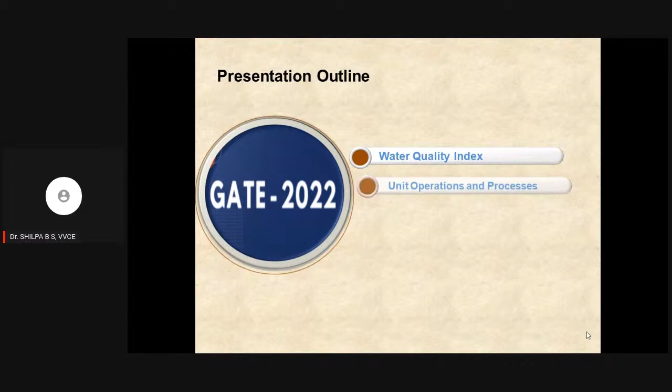So my presentation outline goes like this. I will be dealing with the water quality index initially, then I will go with water treatment unit operations and processes, then the water treatment methodologies, and then the water distribution system we will be studying in this particular session. So let us start with the water quality index.

Water quality index is a means by which the water quality data will be summarized for reporting to the public in a consistent manner. Usually the public will not be aware of the water quality parameters, so it will be represented in the form of a single number or rating, by which the public can be aware of the quality of that water, whether it is suitable for use or not. So we can say the water quality index is defined as the rating that reflects the composite influence of a number of water quality factors on the overall quality of water.

And usually this water quality index is a means of summarizing the parameters that we are considering. Maybe we can consider 4 important parameters, or we can consider 6 parameters or 8 parameters, depending on the scenario. So a large amount of water quality data will be considered and summarized in simple terms, so that it can be reported to the management or to the public or the policy makers, which will help them to take a decision in a considered manner.

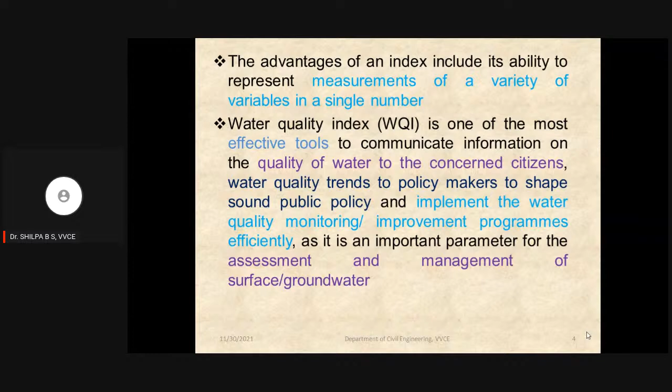So the advantages of this water quality index: it represents the measurements of a variety of variables in a single number. We need not see each and every parameter; that single number will tell about the quality. And as per practice, it was found to be a very effective tool to communicate information on water quality to citizens or policy makers, and to implement water quality monitoring or improvement programs in the society.

Coming to the methods of assessing the water quality index, there are 4 methods which are usually followed to express the water quality index. One is the National Sanitation Foundation Water Quality Index, then the Canadian Council of Ministers of the Environment Water Quality Index. The third one is the Oregon Water Quality Index. The fourth one is the Weighted Arithmetic Water Quality Index method.

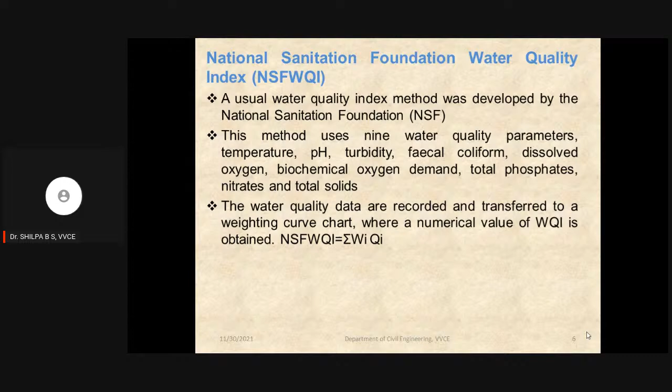Coming to the National Sanitation Foundation Water Quality Index, this is a usual water quality index method developed by the National Sanitation Foundation. In this index, it uses 9 water quality parameters such as temperature, pH, turbidity, fecal coliform, dissolved oxygen, biochemical oxygen demand, total phosphates, nitrates, and total solids. Considering these 9 parameters, the data will be summarized into the form of a single number. The formula used here to assess this water quality index is sigma WI into QI. Based on that mathematical relation, they calculate the water quality index in the national foundation method.

So this is the rating they have given: 90 to 100 rating is excellent, 70 to 90 is good, 50 to 70 is moderate, 25 to 50 is bad, and 0 to 25 is very bad. This gives the classification of the type of water resource usage when the water quality index is in that particular range.

Next is the Canadian Council of Ministers of Environment Water Quality Index. This CCME WQI provides a very consistent method of calculating the water quality index, which is mainly formulated by the Canadian Council of Ministers of Environment.

This index is combinations of 3 factors, not the parameters, 3 factors: F1, F2 and F3. F1 represents the number of variables whose objectives are not met, F2 represents the frequency with which the objectives are not met, and F3 represents the amount by which the objectives are not met.

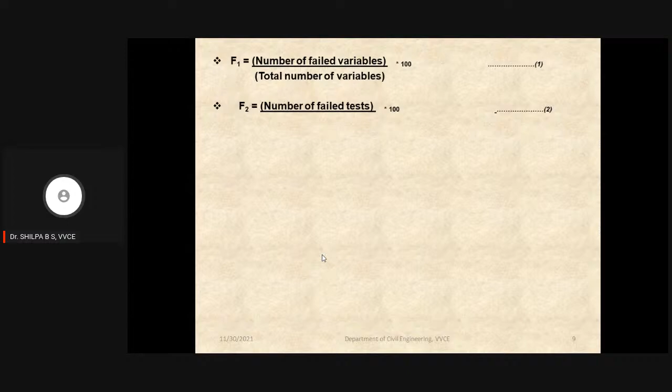F1 can be calculated as the number of failed variables divided by the total number of variables, into 100. F2 is the number of failed tests divided by the total number of tests, into 100. Test values not exceeding the test objectives are considered as excursion.

Depending on the ith parameter, we can calculate this excursion value: failed test value divided by the objective, minus 1. Similarly, for test values not falling below the objective, the excursion i will equal the objective i divided by the failed test value i, minus 1.

Based on these excursions, we can calculate the nse, which is the cumulative of the excursion divided by the number of tests. F3 can then be calculated based on this nse, using nse divided by (0.01 nse plus 0.01), into 100. This mathematical relation is used to calculate F3.

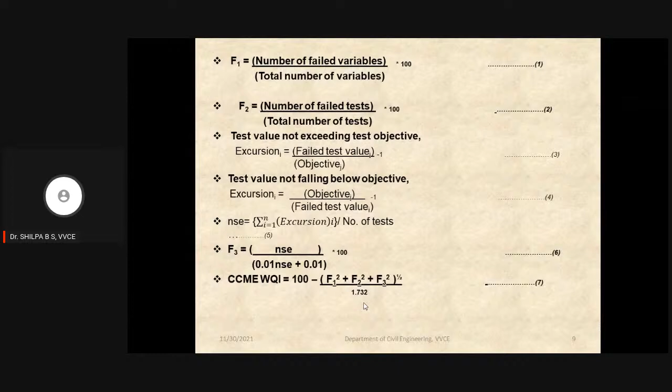The water quality index of CCME equals 100 minus the square root of (F1 squared plus F2 squared plus F3 squared), divided by 1.732. This is the relation used to calculate the water quality index in the CCME model.

This is the rating of CCME WQI. 95 to 100 is excellent — this is the characterization of water when the index is in that range. 80 to 94 is good, 65 to 79 is fair, and 44 to 64 is marginal.

That means the water quality is frequently endangered and conditions very often deviate from the natural levels when the index is in that range. If it is 0 to 44, it's poor, meaning the water quality is almost always endangered and conditions regularly deviate from the natural levels.

Next is the third one, the Oregon Water Quality Index. This index creates a score to evaluate the general water quality of Oregon streams. The parameters considered are temperature, dissolved oxygen, biochemical oxygen demand, pH, ammonia, nitrate nitrogen, total phosphorus, total solids, and fecal coliform.

This Oregon water quality model is designed based on the Delphi method. In this method, the water quality index employs harmonic averaging to give the ratings.

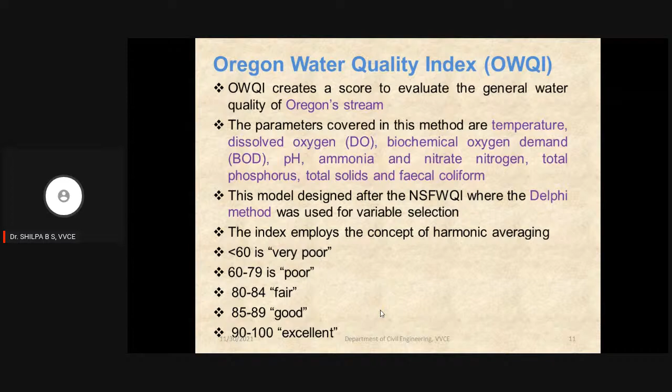Ratings are given as follows: when the water quality index is less than 60, it is considered very poor; 60 to 79 is poor; 80 to 84 is fair; 85 to 89 is good; and 90 to 100 is excellent. That is about the Oregon Water Quality Index.

Coming to the fourth one, that is the weighted arithmetic water quality index method. This method classifies water quality according to the degree of purity by which the most commonly measured water quality variables are considered, and is widely used by most researchers or scientists while calculating the WQI. The formula is: WQI equals sigma Wn into Qn, divided by sigma Wn, where Wn equals K by Sn.

Sn is the standard permissible value of the nth parameter. Whatever number of parameters we consider, we need the standard value of that particular nth parameter. Qn equals 100 into (Vn minus Vio) divided by (Sn minus Vio), where Vn is the estimated value of the nth parameter that we have measured, and Vio is the ideal value of that nth parameter in its purest form.

Based on this we can calculate Qn, and K equals 1 divided by sigma Si, where i varies from 1 to n depending on the number of parameters. Si is the standard permissible value for the nth parameter. Based on this formula, whatever parameters we consider, we can calculate the WQI using the weighted arithmetic method.

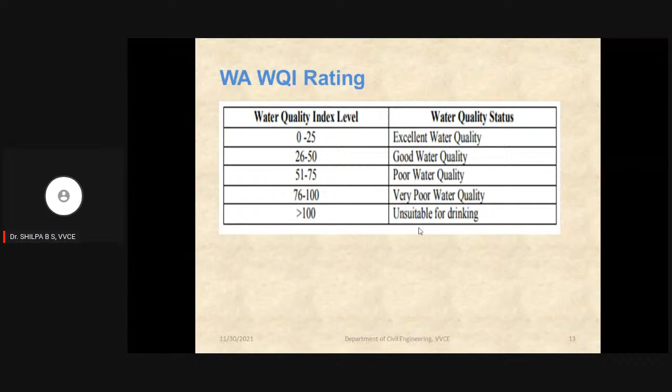So here it will start with 0 to 25, which is considered excellent water quality, 26 to 50 good water quality, 51 to 75 poor water quality, 76 to 100 very poor water quality, and more than 100, which we can say is unsuitable for drinking purposes. Once it exceeds 100, it is considered unsafe to use that water. So this is about the water quality index.

Next we will start with water treatment. But before we know about water treatment, let us understand what are the objectives or goals of treating the water.

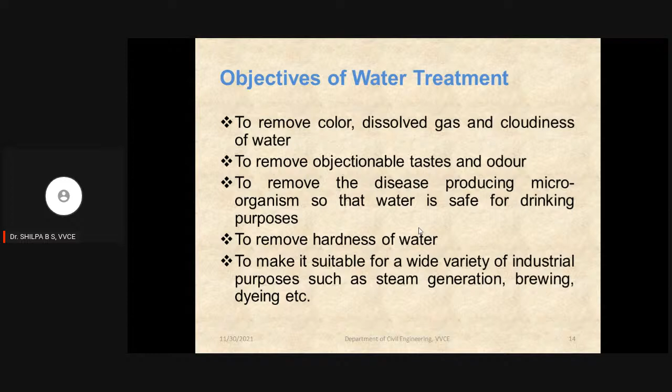First and foremost, we need to remove the color, dissolved gases and cloudiness present in the water by providing treatment. Then to remove objectionable tastes and odor, then to remove disease producing microorganisms so that we can make water safe for drinking, and to remove the hardness of water. Then to make it suitable for a wide variety of industrial purposes, because based on the type of industry, the quality of water we need to supply will vary. To make it suitable for industrial processes, we have to provide treatment to the water.

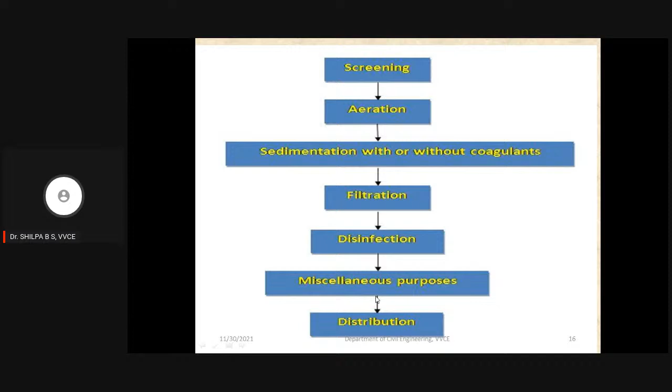So this is again a flow sheet showing the different unit operations and unit processes used in water treatment. Starting from the screens present in the intake structures, then when we come to treatment, it starts with aeration, sedimentation with or without coagulation, depending on the quality of water being taken. Next comes filtration, disinfection, and then miscellaneous treatment. Depending on the purpose for which we need to supply water, apart from the conventional treatment, we need to provide some additional treatment methods, referred to as miscellaneous treatment. Then we can go for distribution.

So coming to the treatment methodologies, generally water treatment methodologies are classified as unit operations and unit processes. Unit operations are those treatment methods where physical forces predominate. Whereas unit processes are those treatment methods where chemical or biological processes take place, where addition of chemicals or biological organisms brings about the treatment in water. So broadly, we classify treatment methods as unit operations and unit processes.

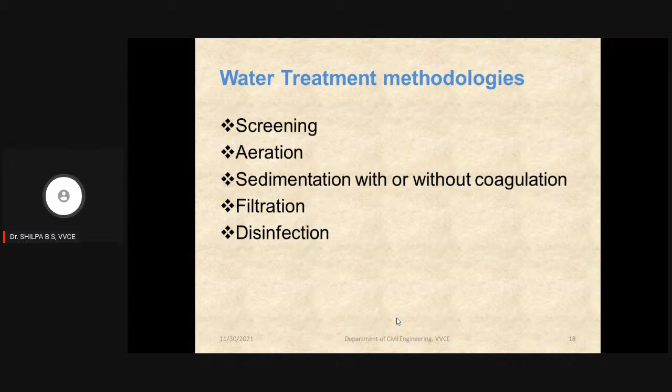Now let us know what water treatment methodologies are adopted: screening, aeration, sedimentation with or without coagulation, filtration, and disinfection. These are the conventional treatment methodologies adopted in almost all water treatment plants before supplying to the public. We will discuss these methodologies in detail one by one.

Starting with, before that, this is one question from a previous year GATE paper. Potable water is prepared from turbid surface water by adopting the following treatment sequence. They are asking us for the treatment sequence - what will be the correct sequence?

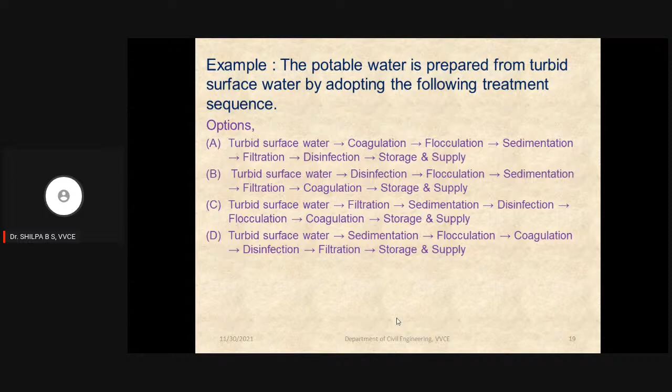The options given are: first, turbid surface water, coagulation, flocculation, sedimentation, filtration, disinfection, storage, and supply. Second, turbid surface water, disinfection, flocculation, sedimentation, filtration, coagulation, storage, and supply. Third, turbid surface water, filtration, sedimentation, disinfection, flocculation, coagulation, storage, and supply. And the fourth option given is turbid surface water, sedimentation, flocculation, coagulation, disinfection, filtration, and storage, and supply.

So among these four options, the correct option is option A, because for turbid surface water, this is the sequence of treatment we provide to remove turbidity or other impurities. First we need to add the coagulant, which we call coagulation.

Once coagulation takes place, we have to remove those suspended solids through flocculation, and then go for sedimentation. In sedimentation, the bigger size flocks are removed, whereas the supernatant is taken to the filtration unit using various types of filters, to remove the fine suspended flocks. After filtration, we go for disinfection, the last phase of water treatment. After disinfection, the water can be stored and supplied to the public. This is the correct sequence of water treatment.

Coming to the first treatment methodology we are discussing, aeration. This is one of the unit operations where gas transfer takes place, and it is very important to exchange gases between the atmosphere and water.

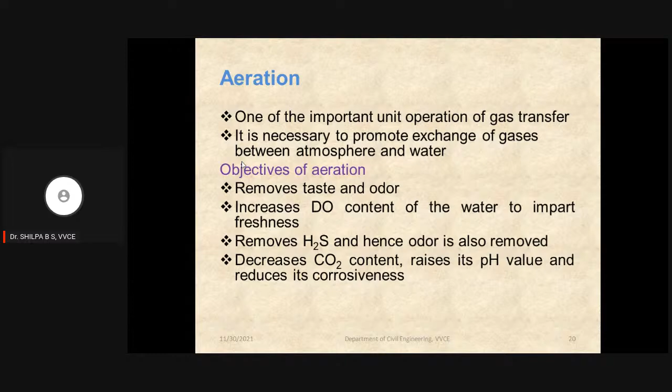The objective of aeration is mainly to remove taste and odor, to increase the dissolved oxygen content of the water, to impart freshness, and to remove hydrogen sulfide. Once hydrogen sulfide is removed, odor can be removed, because hydrogen sulfide imparts a rotten egg smell to water. Similarly, aeration decreases the carbon dioxide concentration, increases the pH value, and removes iron and manganese from the soluble state to the insoluble state.

Aeration can also be used as a process by which we can mix chemicals with the water. These sketches show the exchange of gases from the water bubble, or from the liquid to the gas.

In the first sketch, we consider an air bubble surrounded by water. Here the saturation value is shown to be less than the concentration of DO present in that gas, meaning the saturation value is lesser than the actual DO concentration of the gas. In such cases, if the liquid surrounding the air bubble or gas bubble has a lesser concentration of DO, the gas will move from the gas phase to the liquid phase.

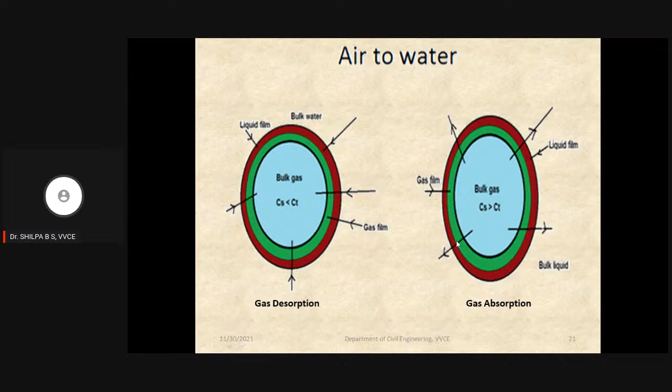Next comes gas absorption, when the saturation value is higher than the actual DO concentration. In that case, the liquid will absorb the oxygen. This happens as per Henry's law.

Factors that affect the exchange of gases are the area of interface between air and water, the thickness of the interlayers, the time of contact between the two films, the partial pressure of the gas overlaying the atmosphere, and the degree of undersaturation or oversaturation of the gas in water. These are the important factors that vary the dissolution of oxygen.

Let us know what is important to keep in mind for proper aeration. First, we need to increase the area of water coming in contact with air. Most of the time, water is sprayed into smaller droplets so that we can increase the area of contact of water with the gas. This is one way to have proper aeration or increase the rate of aeration.

The second thing is to keep the surface of the liquid constantly agitated so that we can reduce the thickness of the liquid film. When the thickness of the liquid film is less, it initiates or increases the rate of exchange of gas. With turbulence, mixing of water takes place within the body, and a thin layer of water comes to the surface every time, getting exposed to the atmosphere, increasing the rate of exchange.

The third point is to increase the time of contact of the water droplet with air, or to increase the time of flow of water. If we allow the droplets to travel a longer distance in the air before being collected, or make the water flow in a thin film, we can make it flow for a longer period of time before it reaches the next treatment unit.

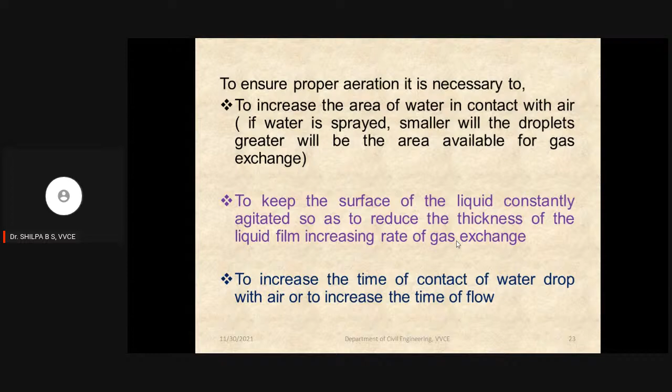By this we can increase the time of contact between the water and the gas, and we can increase the rate of aeration.

The two important mechanisms on which aerators are classified: one is forming droplets or thin sheets of water which are exposed to atmosphere. That is one type of aerator.

The second principle on which aerators are designed is forming small bubbles of air which rise in water. So, forming thin films exposed to atmosphere is one form, where fine bubbles of air rise within the water.

Here water is brought in contact with air in the form of a thin film, whereas in the second type small air bubbles are made to come in contact with the water. Based on these two mechanisms the aerators are designed.

The important types of aerators are free fall aerators, commonly referred to as gravity aerators. We have four gravity aerators: cascade aerator, inclined apron aerator, slat tray aerator, and gravel bed aerator.

The other three types are spray aerator, mechanical aerator, and air diffusers or diffused aerators.

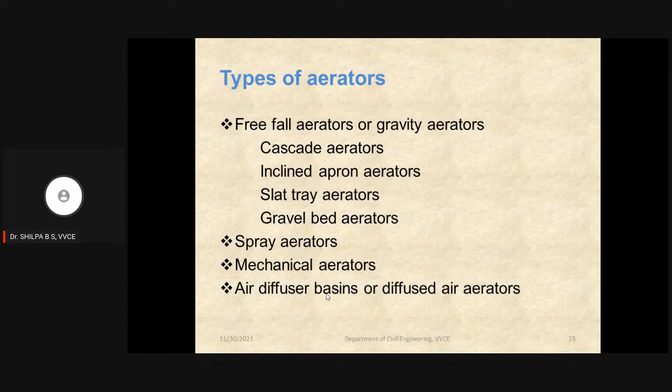Of these four types, in water treatment plants the most commonly used is the gravity aerator, specifically the cascade type, whereas others are majorly used in wastewater treatment, not much in water treatment. This is the cascade aerator.

You can see the schematic representation of the cascade aerator, where the raw water is made to pass over a number of steps in the form of a thin film. When it passes from one step to another,

the water is made to flow in the form of a thin film, as you can see in the picture.

In this way we make the water film exposed to the air, and when we provide more steps, we increase the time of contact of the liquid film with the air.

The design criteria - please remember these, as one or two questions may be asked on this. The number of steps usually provided is 4 to 6.

The head requirement for this cascade aerator is 0.5 to 3 meters, and the space required is 0.015 to 0.045 square meter per cubic meter per hour. The gas removal efficiency of this cascade aerator is 20 to 45% for carbon dioxide, and 35% for hydrogen sulfide.

This is the multiple tray aerator. Usually in this multiple tray aerator, coke or waste ceramics are placed to increase the surface area of exposing the liquid film to the air.

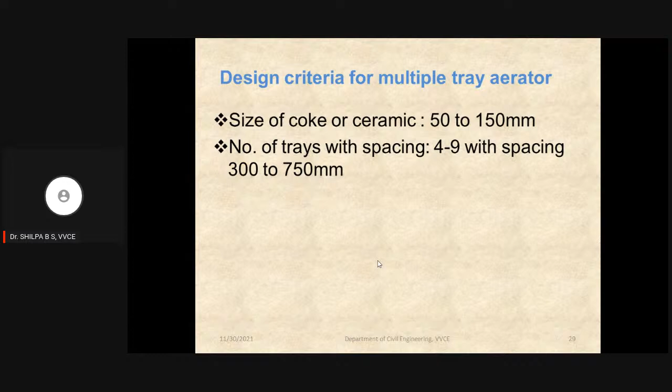Usually the spacing provided is 300 to 750, and the height of the multiple tray will be maximum 3 meters, so it can vary from 1 to 3.

The space required for this multiple tray aerator is 0.013 to 0.042 square meter per cubic meter per hour. The gas removal efficiency in this case is 65 to 90% for carbon dioxide.

And 60 to 70% of hydrogen sulfide can be removed, because here we increase the surface area of exposure of the liquid film to the air by providing coke or waste ceramic of size up to 150, which increases the efficiency of this aerator.

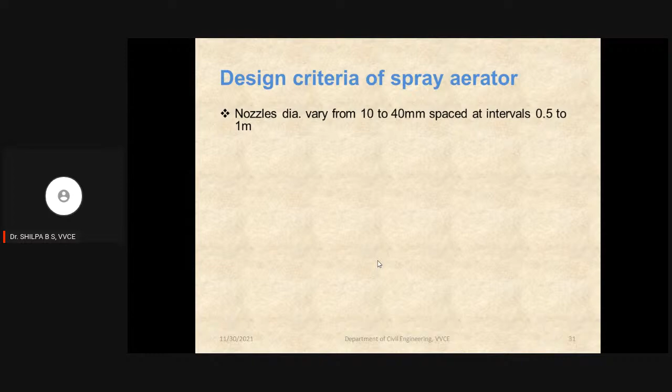The next type is spray aerators. As mentioned, it is mostly used in wastewater treatment, not much in water treatment. Here the nozzle diameter varies from 10 to 40, the nozzles are spaced at intervals of 0.5 to 1 meter, and the pressure head at the nozzle is about 7 meters.

Theoretically the pressure head required at the nozzle is 7 meters, but in practice this value varies from 2 to 9 meters. The discharge rating per nozzle is about 18 to 36 cubic meters per hour,

and the area of the aerator is 0.03 to 0.09 square meter per cubic meter per hour. The gas removal efficiency for carbon dioxide is 70 to 90%, and 90 to 99% of hydrogen sulfide is removed in this type of aerator.

So that's why it is most commonly used in wastewater treatment.

And the time of exposure of the droplet - they may give some data and ask you to calculate the time of exposure of the droplet. The most commonly used formula is T equals 2 CV into square root of 2H by G into sin X, where H is the total head of water at the nozzle, CV is the coefficient of velocity, and X is the angle of inclination of the nozzle. Considering that, we can calculate it.

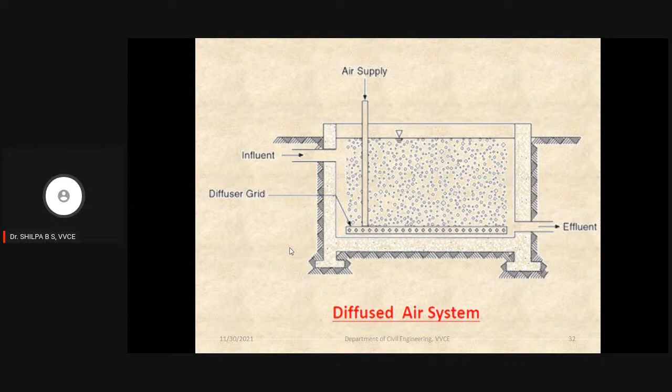Next, the fourth type of aerator - other aerators are the diffused aerators and the mechanical aerators. Since these are mostly used in wastewater treatment, I won't be explaining much about them.

Next, coming to the advantages of aeration. With respect to iron and manganese removal, more than 0.3 milligram per liter of iron will cause yellow to reddish brown color in the water, and sometimes it makes stains on the plumbing fixtures. This can be avoided when we provide aeration.

And if the iron and manganese concentration exceeds 1 milligram per liter, then a metallic taste will be imparted to the water, so that can be removed. And if the water contains both iron and manganese, the staining could vary from dark brown to black, depending on the concentration. At the same time, in the aeration process, the water is saturated with oxygen.

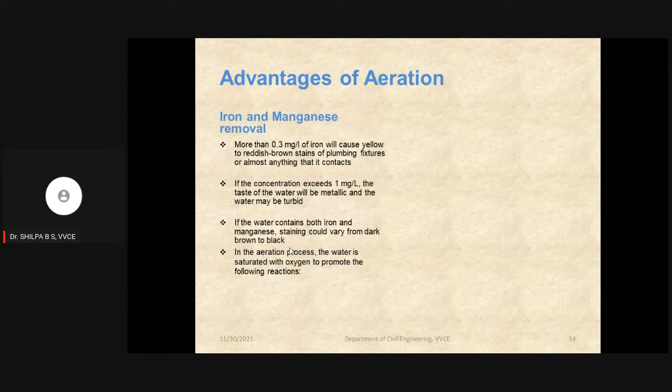Once saturated with oxygen, the oxidation products - ferric hydroxide and manganese dioxide - become insoluble, and after aeration these can be removed by clarification or other filtration processes. So these are the advantages of aeration with respect to iron and manganese removal.

Coming to hydrogen sulfide removal - hydrogen sulfide is removed by bubbling the water or by cascading, and with this, elemental sulfur will be released.

Aeration will be most effective when hydrogen sulfide is lower than 2 milligrams per liter, not more than that. If it is less, then we can effectively remove it using the aeration process.

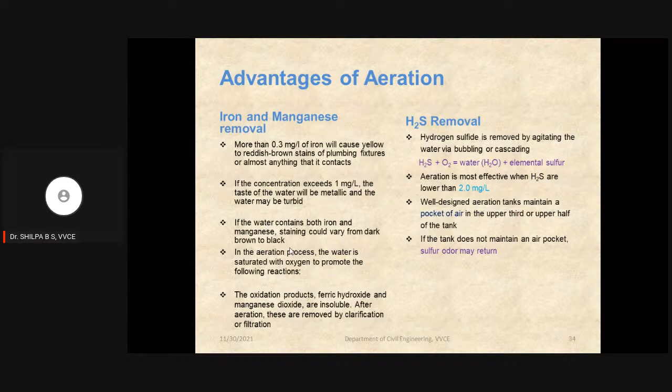A well-designed aeration tank will maintain pockets of air in the upper third or upper half of the tank, which increases the efficiency. If the tank does not maintain the air pockets in correct proportion, then the sulfur odor may return, or it may get dissolved back into the water. So that is with respect to hydrogen sulfide removal.

Coming to the limitations of aeration - it is a unit operation that requires a significant head of water, and the water will be rendered more corrosive after aeration, meaning more oxygen is being dissolved in the water.

When the dissolved oxygen is high, the water becomes more corrosive, and if the plumbing fixtures we use are made of iron or steel, the chance of corrosion is very high. For removal of taste and odor, aeration is not highly effective, but can be used in combination with other adsorption techniques or chlorine treatments.

Additional lime may be required to neutralize the carbon dioxide that would be removed by the aeration. So these are the limitations observed when aeration has been provided as one of the treatment methodologies.

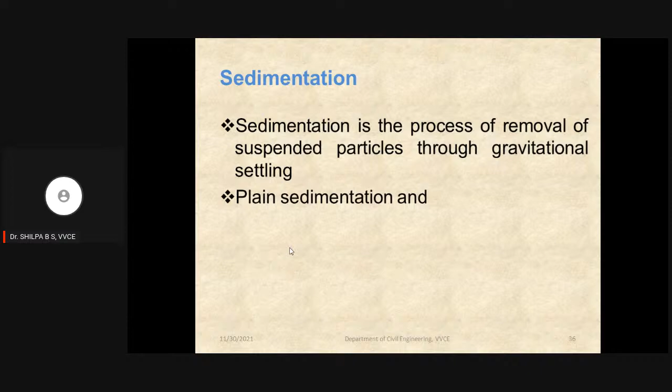Coming to the next method - sedimentation. It is the process of removal of suspended particles through gravitational settling. Depending on the usage of chemicals, we can classify it as plain sedimentation, and sedimentation with coagulation, where a chemical is used in the treatment - this is generally called clarification, and the treatment unit is called clarifiers.

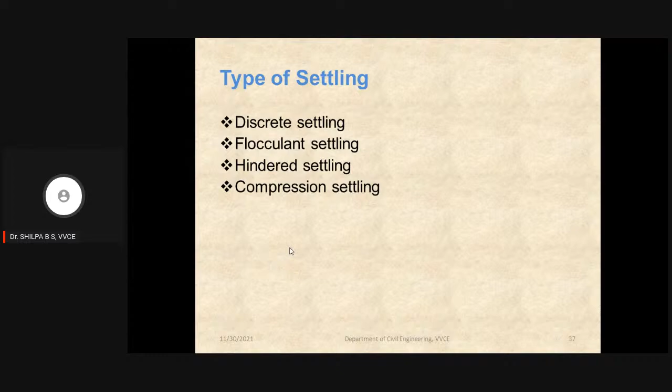Actually, when we do the sedimentation process, it is the settling of particles. Based on the nature of the particles present in the water body or water column, various types of settling are observed - there are four types: discrete settling, flocculant settling, hindered settling, and compression settling. As you have studied in BE, sedimentation is mainly dependent on Stokes' law.

It is especially more effective for particles having a diameter less than 0.1 mm, and this is the settling velocity that we can calculate.

So Vs equals to G into Gs minus 1 divided by 18ν into D square, where Gs is the specific gravity of the solids, and ν is the kinematic viscosity.

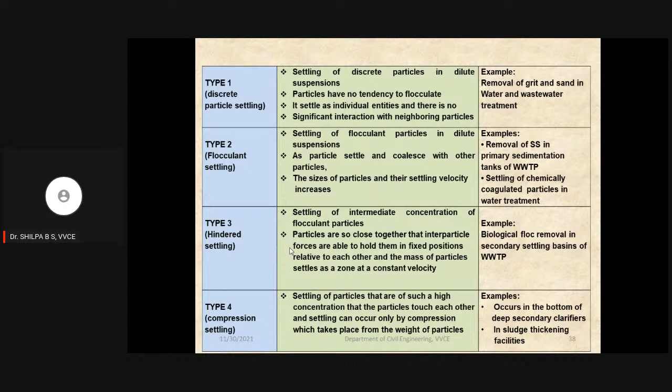This table shows what type of particles will get settled, and where exactly these types of settling will be observed in water and wastewater treatment. I have just listed them here.

Here the water will be taken into a tank, and that particular volume of water will be retained in the tank for some duration. After the specified time period, the water will be taken out of the tank through the outlet. So the process will not be continuous in nature. It is referred to as an intermittent sedimentation tank, that's why I call it a fill and draw type, or draw type sedimentation tank.

Whereas the most commonly used is the continuous type tank, because in a water treatment plant, water has to be treated continuously so that we can meet the public demand to supply water.

In such cases we need the continuous type tank, where water will enter at one end of the tank, in such a way that the entering water should not affect the outflow water.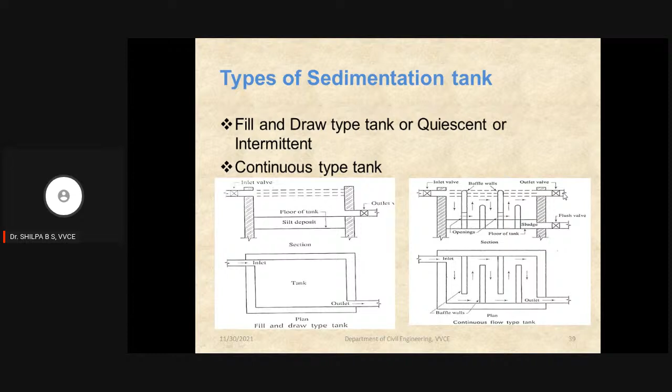Baffle walls will be provided, various numbers of baffle walls, so that we can increase the time of travel of that water. At the same time, during this time of travel, we can remove the suspended particles which have gotten flocculated or hindered, allowing these particles to settle, and the sludge can be taken out from the bottom of the tank. The supernatant can be taken at the outlet provided at the top of the tank. This continuous type tank is most commonly used in the water treatment plant.

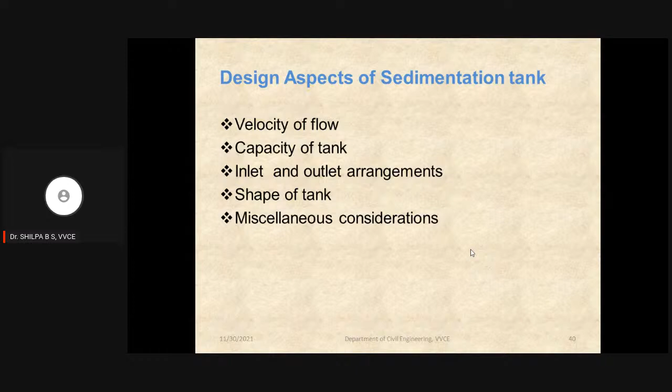Coming to the design aspects, the important factors that affect the designing of the sedimentation tank are velocity of flow, capacity of the tank, inlet and outlet arrangement, shape of the tank, and other miscellaneous considerations. These are the five aspects that will be considered while designing the sedimentation tank.

Coming to the velocity of flow, obviously when the velocity of flow is slow, the rate of settling of the particles will be high. Then coming to the most important design factor, the capacity of the tank.

Capacity of the settling tanks is determined by two methods: one based on the detention period, the other based on the overflow rate. So how do we find the detention period, or what is detention period? It is the theoretical time taken by a particle of water to pass between the entry and exit of a settling tank, and this theoretical time we call the detention period or detention time.

To calculate the capacity of the tank, represented as C, C equals to Q into T, where Q is the rate of flow of water per hour and T is the detention time in hours. The rate of flow is usually considered in meter cube per hour, and time is the detention time, 1 hour or 2 hours or 3 hours, depending on the concentration of solids. When we multiply these two, we get the capacity in terms of meter cube.

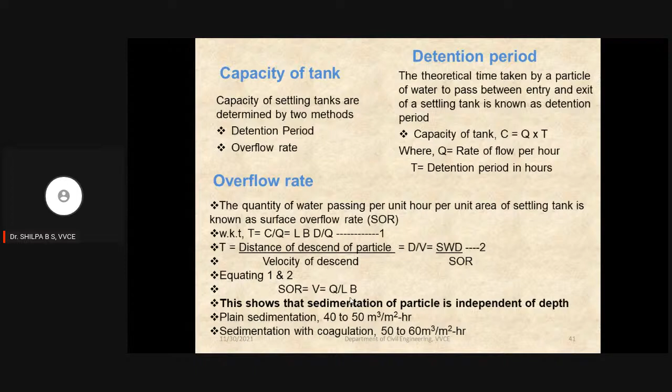So for plain sedimentation, when no chemical is used, the surface overflow rate is considered between 40 to 50 meter cube per meter square per hour, whereas for sedimentation with coagulation, 50 to 60 meter cube per meter square hour is considered.

The shapes of tank that we can use in sedimentation are rectangular tank with horizontal flow, circular tank with radial or spiral flow, and hopper bottom tank with vertical flow. This is the rectangular tank.

This is the rectangular sedimentation tank where the flow is horizontal, and this is the circular tank with radial or spiral flow, where at the center of the circular tank the inflow or inlet will be provided, and that will flow on either side of the inlet.

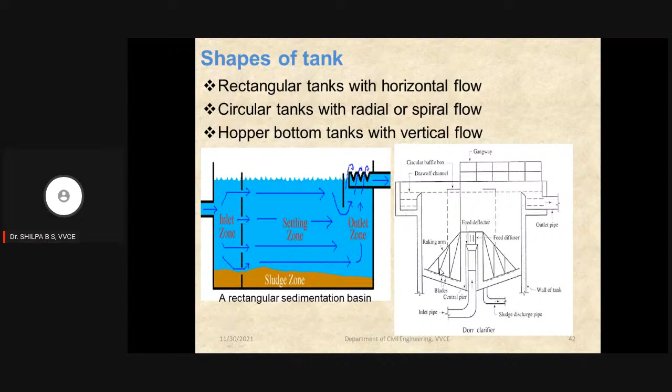Most of the time in the GATE previous year question papers, the most commonly asked questions are on water treatment, sedimentation, flocculation, filtration, and disinfection. These are the four processes on which the most common questions are asked. So let me take up a few of those questions.

First example: consider a primary sedimentation tank in a water treatment plant with the surface overflow rate as 40 meter cube per meter square day. Diameter of the spherical particle which will have 90% theoretical removal efficiency in this tank is how much, they are asking. We need to calculate the diameter of the particle, assuming the settling velocity of the particle in water is described by Stokes law. Density of water is 1000 kg per meter cube, density of the particle is 2650 kg per meter cube, acceleration due to gravity is 9.81 meter per second square, and kinematic viscosity of water is 1.1 into 10 to the power minus 6 meter square per second.

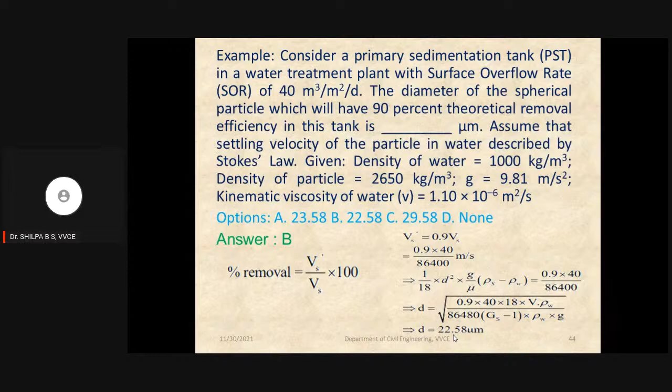So by dividing 40 by 86,400, I'm converting that to meter per second. Now Vs will be equal to 1 by 18 into d square into g by mu into rho s minus rho w, where rho s is the specific density of the suspended solids, and rho w is the density of the water. By substituting all these values and simplifying for d, we get the diameter as 22.58 micrometer. That is the answer for this example.

The next one is: a water supply board is responsible for treating 1500 meter cube per day of water. A settling column analysis indicates that an overflow rate of 20 meter per day will produce satisfactory removal for a depth of 3.1 meter, and it is decided to have two circular settling tanks in parallel.

So we need to calculate the diameter of the settling tank, expressed in meters. The options given are 6.5, 9.61, 6.91, and 8.1. As per our calculation, the correct answer is 6.91. Let us see how.

The total area of the sedimentation tank required: we know the flow rate Q and the overflow rate, so we write 1500, the flow rate, divided by the overflow rate of 20. This gives the area required to treat that water, which is 75 meters square. In the problem they said it is decided to have two circular settling tanks, so the number of tanks to provide is 2. Then the area of each tank will be 75 meters square by 2, that is 37.5 meters square.

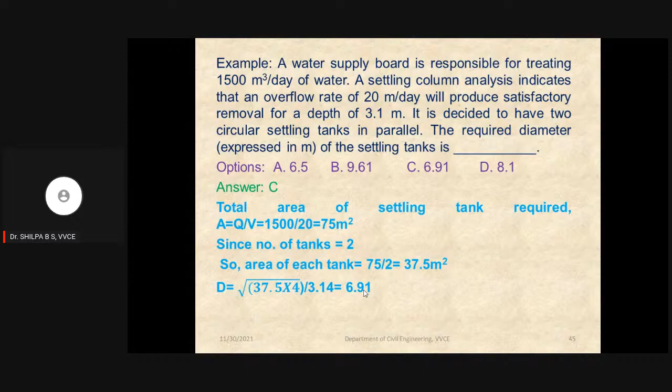The next example is: two identically sized primary sedimentation tanks receive water for type 1 settling under laminar flow conditions. The surface overflow rates maintained in the two tanks are 30 meter cube per meter square day and 15 meter cube per meter square day. The lowest diameter of the particle which shall be settled out completely under these surface overflow rates are designated D30 and D15 respectively.

Now they are asking us the ratio of D30 by D15. It is very simple. As per our calculations, the answer we get is 1.41. For type 1 settling, that means discrete particles, it is Stokes' law that governs the settling of particles in that type 1 settling.

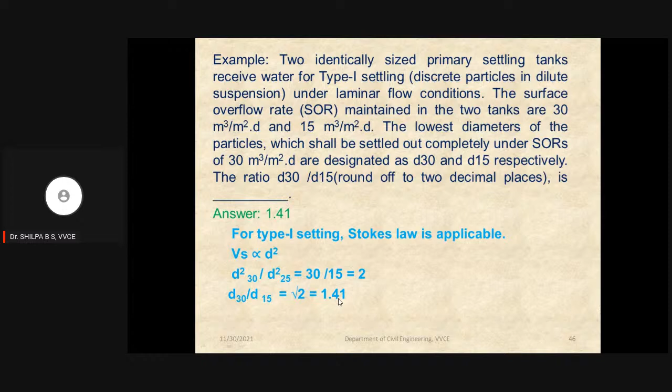Vs is directly proportional to the square of the diameter. Now I will take the ratio of the diameters: d square by d30, d square by d15 equals 30 by 15, because they have given the surface overflow rates as 30 and 15. So 30 by 15 equals 2. And since these are squares, we need to take the square root of 2. So square root of 2 equals 1.41, which is the ratio of D30 by D15. That's how we calculate it.

And clarified water will be coming out of those tubes or the plates, and then that clarified water will be taken to the next treatment unit. So this will be increasing the efficiency of the sedimentation tank. Tube settlers or the lamella plates increase the efficiency of the sedimentation tank to the maximum extent.

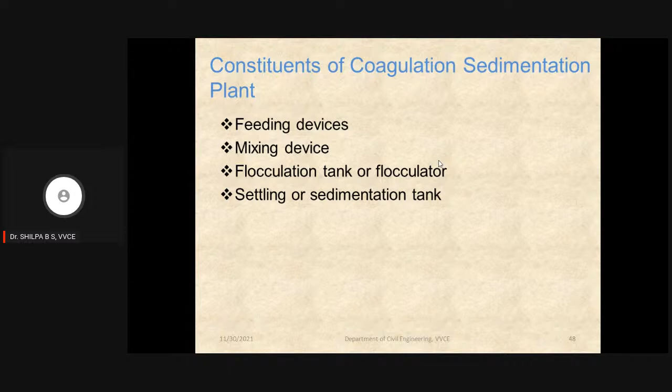Next, coming to the constituents of the coagulation and sedimentation plant: the feeding devices, mixing devices, flocculation tank, and then the settling or sedimentation tank.

So the coagulants are the chemicals that are used to destabilize the colloidal particles. The process of adding the coagulant is known as coagulation. In this, the destabilization of colloidal and fine particles takes place, and also the initial aggregation or agglomeration of these destabilized particles takes place.

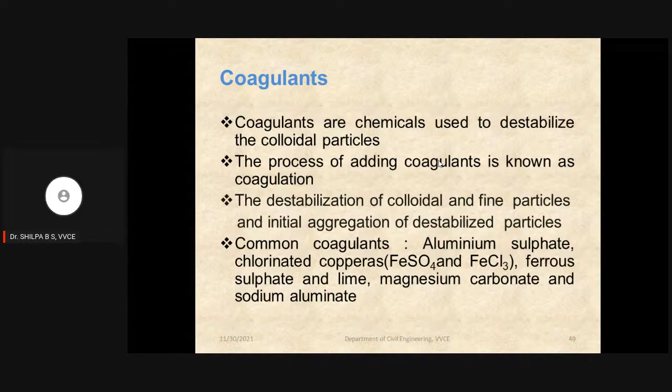So the common coagulants that are used are aluminum sulfate, chlorinated copperas, ferrous sulfate, lime, magnesium carbonate, and sodium aluminate. The principle of coagulation,

mainly the flock formation and the electric charges. These are the two important principles on which the coagulation process happens.

So during this process, the destabilization of the colloidal particles happens due to the double layer compression of the colloidal particles, then the charge neutralization, as you can see in the sketches. So there will be positive and negative charge which will get neutralized.

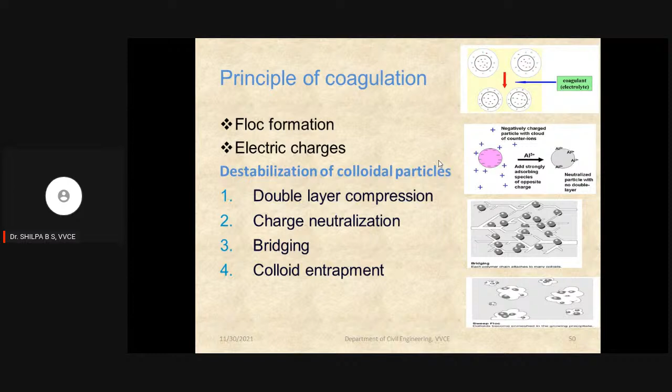Then the bridging will take place between the particle and whatever precipitate that is formed, and the colloids will get entrapped in whatever precipitate is formed.

Okay, so this is one problem. The surface water treatment operates round the clock with a flow rate of 35 meter cube per minute. The temperature of water is 15 degrees centigrade, and the jar test indicated an alum dosage of 25 milligram per liter with flocculation at a GT value of 4 into 10 to the power of 4, producing the optimal results.

And we need to calculate the alum quantity required for 30 days of operation of that water treatment plant. To calculate that, we have to know the optimum dose. According to this data, 25 milligram per liter, and the flow rate is important, 35 meter cube per minute. So among the options given, the correct answer is

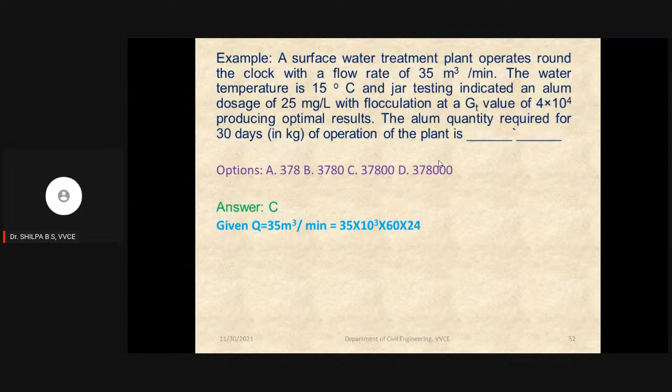37,800. Okay, let us see whether this is in kg or mg. Now we know the flow rate is 35 meter cube per minute, so I will convert that to meter cube per day by multiplying by 60 and 24.

And we know the alum dosage as 25 milligram per liter. So usually the dosage or quantity required will be calculated in terms of kgs. So now to calculate the alum quantity for 30 days, we will multiply the flow rate in meter cube per day by the alum dosage required, 25, converting that into kg by multiplying by 10 to the power of minus 6.

Okay, so then 30 is the number of days in a month. When we simplify this, we get the answer: 37,800 kg. That is the total quantity of alum required in that water treatment plant to treat the water.

Okay, so next is feeding the coagulants. There are two types of feeding: dry feeding and wet feeding. You can just remember that you have studied this in your sixth semester courses.

So there will be wet feeding, which will be operated with the help of the rack and pinion arrangement. The solution will be made and collected or stored in a tank, and then depending on the dosage, an arrangement is made to allow the flow of the alum solution or coagulant solution to the water in a mixing channel.

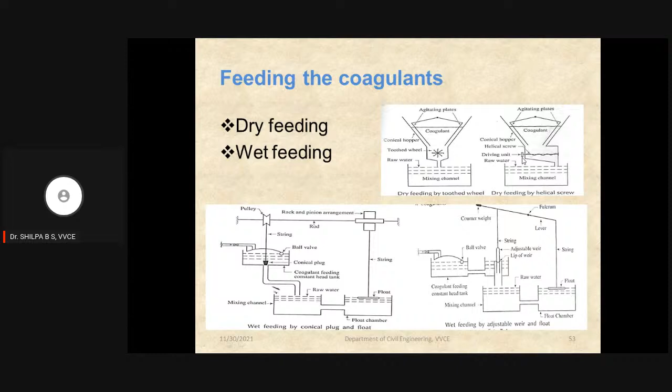Whereas in case of dry feeding, either a toothed wheel will be used, or the helical screw will be used to add the coagulant in the form of dry powder.

Even the compressed air and hydraulic jump method, mixing channel, and the mixing basins or other mechanical means are used to mix the coagulant with the water.

The next process is flocculation. It is a tank where the flocculation process takes place, which we call the flocculator. The gentle agitation of the aggregates destabilizes the particles and forms the flocs in that tank.

According to various researchers, the power required in terms of watts can be calculated for the flocculator, because the flocculator has to run slowly. We use the relation P equals half CD into rho into AP into VR cube, and another relation G equals square root of P divided by mu V. These relations help calculate the power requirement, where G stands for the mean velocity gradient, V stands for the flocculator volume, mu stands for the absolute viscosity, VR stands for relative velocity of the paddles, AP is area of the paddles, and CD is the coefficient of drag of the paddles.

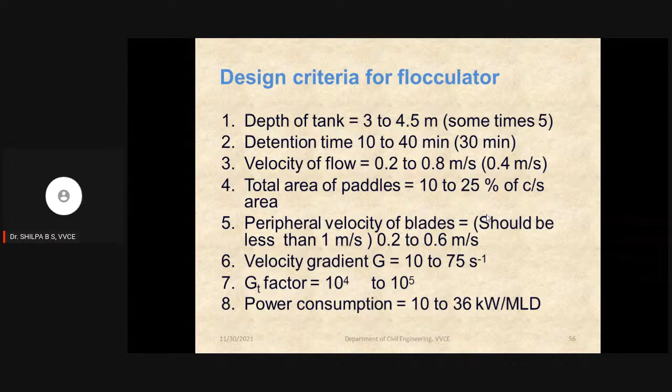The peripheral velocity of the blades will be 0.2 to 0.6 meter per second. Velocity gradient will be 10 to 75 per second, and GT value will vary from 10 to the power of 4 to 10 to the power of 5, and power consumption will vary from 10 to 36 kilowatts per mld of water. Outlet velocity 0.15 to 0.25 meter per second.

CD, the drag coefficient, is 1.8. The distance between the paddle edge and the side of the basin will be about 15 to 40 centimeters, and the K value is 0.25. The relative velocity is 75% of the paddle velocity. Area of the paddles equals length of the blades into width into the number of blades in that compartment, and the distance between two paddles in the same compartment is usually about 1 meter.

Please remember these relations so that in case of any short problems you can just use them. One commonly asked problem on flocculation is calculating the power requirement.

A flocculator tank contains 1,800 meter cube of water, which is mixed using paddles at an average velocity gradient of 100 per second. The water temperature and corresponding dynamic viscosity is 30 degrees and 0.798 into 10 to the power of -3 Newton second per meter square. The theoretical power required is calculated using the relation

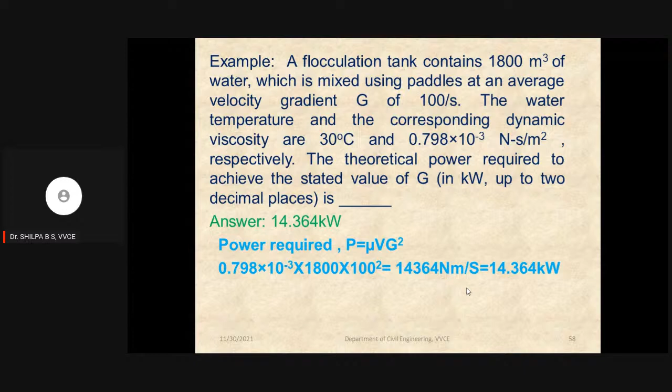P equals mu V into G square. By substituting those values, that is the dynamic viscosity, the volume of the tank, and the G value, we can calculate the power. This comes in terms of Newton meter per second, which can be converted to kilowatt, giving us 14.36 kilowatt.

Coming to the next treatment method, filtration is the process of passing water through beds of sand. The most commonly used filters are the slow sand filter and the rapid sand filter. The third type of filter, used in swimming pools, is the pressure filter.

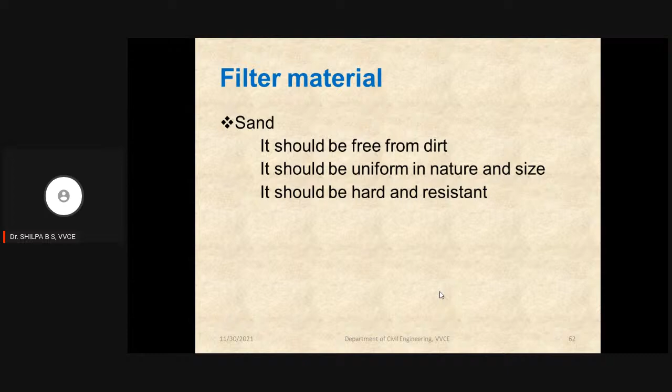And the sand that is being used as filter material should be free from dirt, should be uniform in nature and size, hard and resistant, and should not lose more than 5% of its weight after being placed in hydrochloric acid for 24 hours. And the density should be about 1600 kg per meter cube.

And other than sand, anthrafilt and anthracite are used. So the types of filters based on the rate of filtration: we have slow sand filter, rapid sand filter, and pressure filters. Based on gravity or pressure, we can say gravity filters, where we pass the water under gravitational force - that is slow sand filter and rapid sand filter. But under pressure, we pass the water through the filter media. That type of filter we call pressure filters.

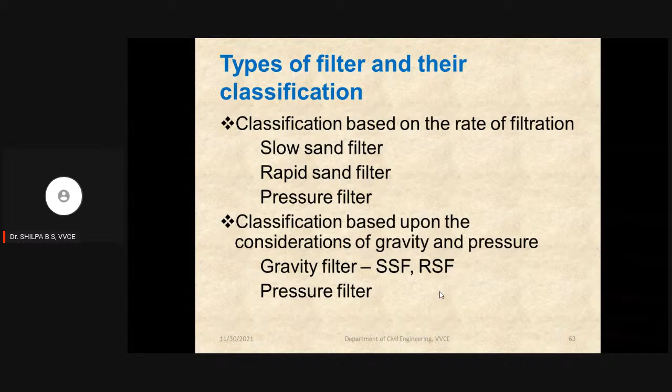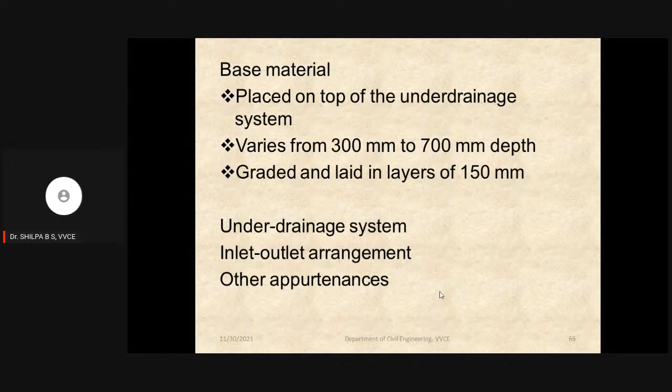Okay, so the base material used in this slow sand filter - its size will be graded or laid in layers of about 150, and the depth of that base material will vary from 300 to 700 depth. Okay, these are the specifications of the size and depth of the layers. Topmost 0.2 to 0.4 size, and the intermediate 0.6 to 2 and 2 to 40, and the lowermost will be 40 to 65.

And this is the plan of the slow sand filter. And the filter head is limited to 0.7 to 1.2. The cleaning of the slow sand filter is not done as easily as we can do in the rapid sand filter. So in this case, scraping at the topmost layer, about 1.5 to 3 centimeter layer will be scraped out if we want to clean that filter media.

And whatever microbial film is formed in the slow sand filter is referred to as Schmutzdecke, or in common we call that the dirty skin. And the rate of filtration of the slow sand filter is about 100 to 200 liters per hour per meter square, and the slow sand filter efficiency is 98 to 99%.

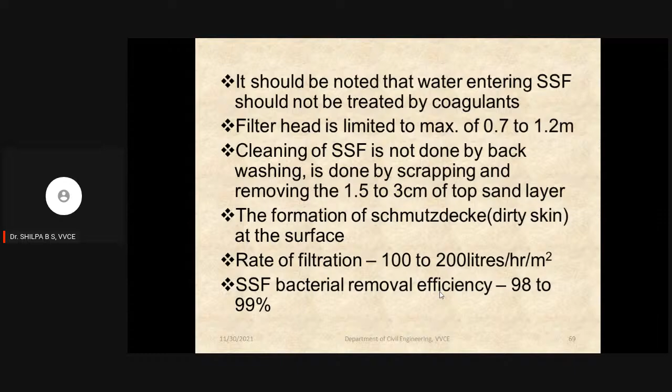So this is the rapid sand filter. Okay, as you know, the important feature of this rapid sand filter is that we are able to give back washing. Okay, and in this, the enclosure tank will have a depth of about 2.5 to 3.5, and the area is 10 to 80 meters square.

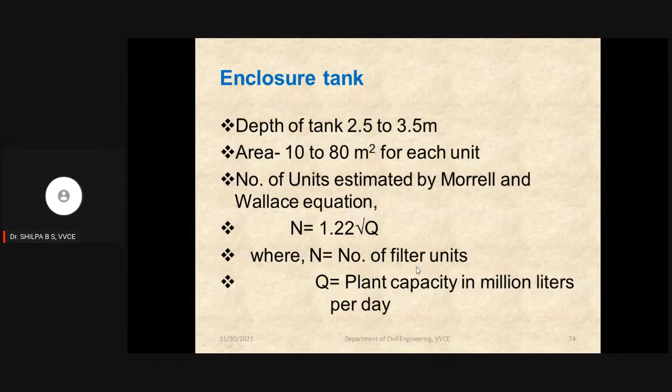And to calculate the number of filter units that is required, the most commonly used empirical relation is the Morrell and Wallace equation: N is 1.22 into root Q. N is the number of filter units and Q is the treatment plant capacity in MLD.

Then the filter media that are being used is 60 to 90 depth of sand layers. Effective size of that sand is 0.35 to 0.55 and the uniformity coefficient is 1.3 to 1.7. Okay, this is the specification of the base material that is required.

And the under drainage of the rapid sand filter - the main objective is to collect the filtered water uniformly and also to provide a uniform distribution of the backwash water without disturbing or upsetting the sand layer that is present above that under drainage. Okay, so for that purpose, this under drainage system is provided in the rapid sand filter.

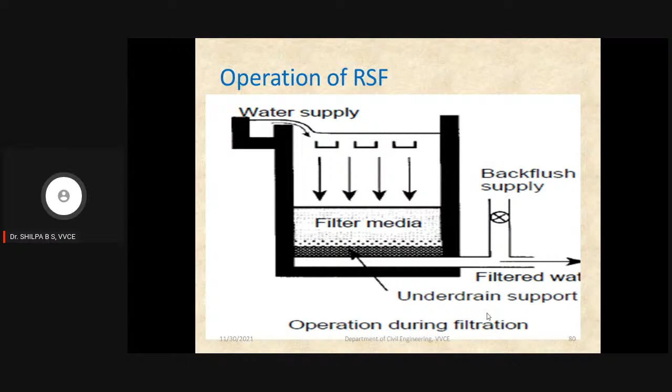So these are the other appurtenances that are provided in the rapid sand filter: wash water troughs to collect the backwash water, air compressor to pass air during the backwashing, and the flow control devices.

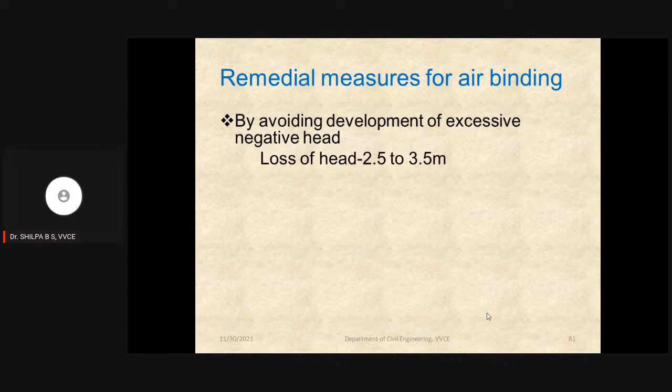So coming to the remedial measures, because there are some operational problems that we observe in the rapid sand filter. So for that, to avoid those problems, by avoiding the development of excessive negative head, the loss of head should be restricted to about 2.5 to 3.5 meters.

Negative head should be a maximum of about 1.2, not more than that. Then controlling the growth of algae by remedying conditions that supersaturate the water with air, and by taking precautionary measures so that the water should not get warmed as it passes through the treatment plant. These precautionary measures will help in overcoming the remedial problems.

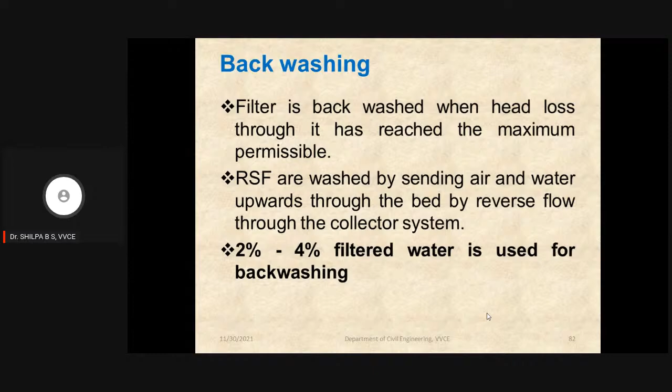So when we talk about backwashing, please keep in mind that about 2 to 4% of the filtered water is used for backwashing.

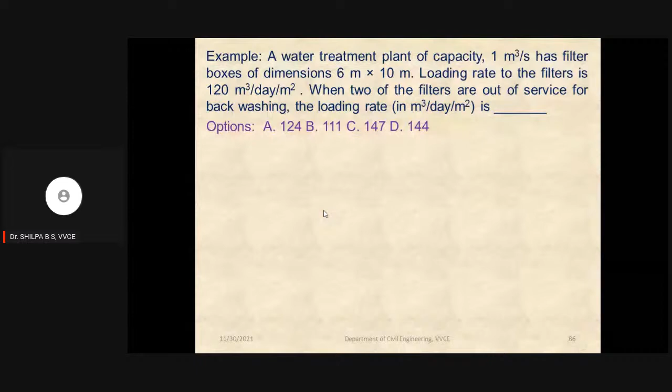Coming to the problem: a water treatment plant of capacity 1 meter cube per second has a filter box of dimension 6 by 10 meter. The loading rate to the filter is 120 meter cube per day per meter square. When 2 of the filters are out of service for backwashing, what is the loading rate we need to calculate? Four options are given, and the correct answer is 144.

The total quantity of water filtration per day is calculated from 1 meter cube per second, converted to meter cube per day by multiplying by 24 into 3600. The surface area loading rate of the filters is given, so the surface area is the quantity of water divided by the loading rate, giving us an area of 720 meter square. The area of one filter, based on the given dimensions 6 into 10, is 60 meter square. So the total number of filters is 720 divided by 60.

So 12 filters are needed. But since 2 filters are kept out of service during backwashing, that means totally 10 filters have to be operated in that treatment plant. The surface area needed is 60 meter square for one filter, so 10 filters will be 600 meter square. Then the loading rate is the total quantity of water being treated divided by the area, giving us 144 meter cube per day per meter square.

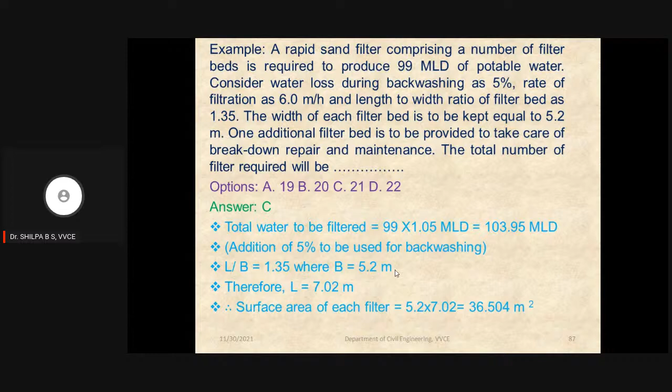So how to calculate that: total water to be filtered is 99 mld, and considering the water loss during backwashing as 5%, we multiply by 1.05, giving a total water to be filtered of 103.95. The length to breadth ratio is 1.35 and the width is given as 5.2 meter, so based on this the length will be 7.02. The surface area of each filter, length into breadth, gives us 36.504.

The total surface area required equals the discharge through the filter divided by the rate of filtration, which gives us 721.875. The total number of working units required is 721.875 divided by the area of each filter, giving around 19.77, which we round up to 20 filters. One filter is added as standby, so totally 21 filters are needed.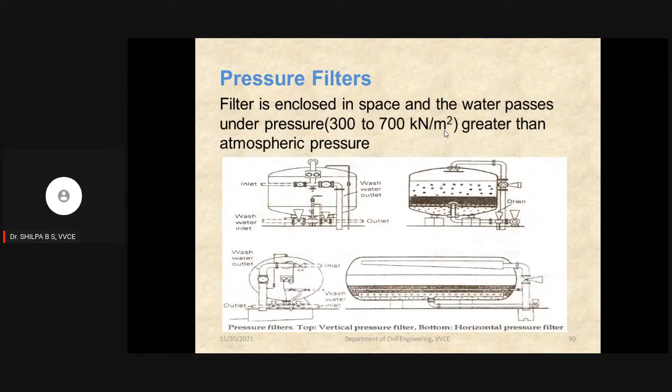Diameter is 1.3 to 3 meters, and height will be 3.5 to 8 meters. This filter is very easily cleaned, and again it is done under pressure. The rate of filtration is 6,000 to 15,000 liters per square meter, but the efficiency is less than that of the rapid sand filter.

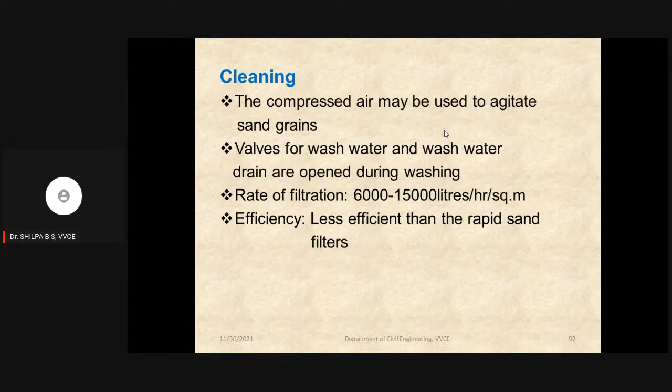Coming to disinfection, it is the process of killing pathogenic organisms. Here a chemical substance will be added to kill the microorganisms, and that substance is called the disinfectant.

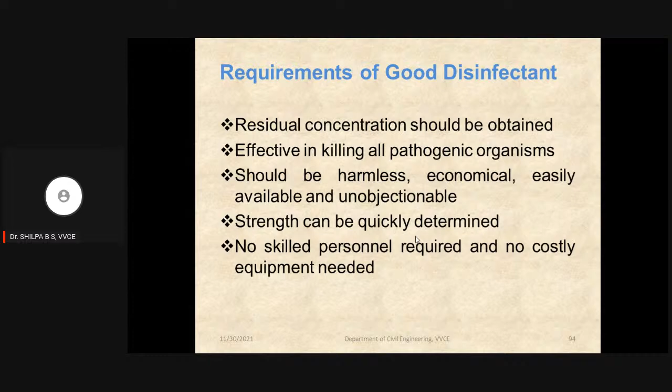The good requirements of a disinfectant: it should leave a residual concentration, it should produce harmless water after treatment, and also be economical, easily available, unobjectionable, and its strength can be quickly determined. No skilled personnel should be required, no costly equipment is needed, and it should react within a reasonable time.

The various methods of disinfection are physical methods, like heat, and chemical methods like oxidizing agents, metal ions, alkalis, acids, and surface active chemicals. I don't want to deal with these minor methods of disinfection.

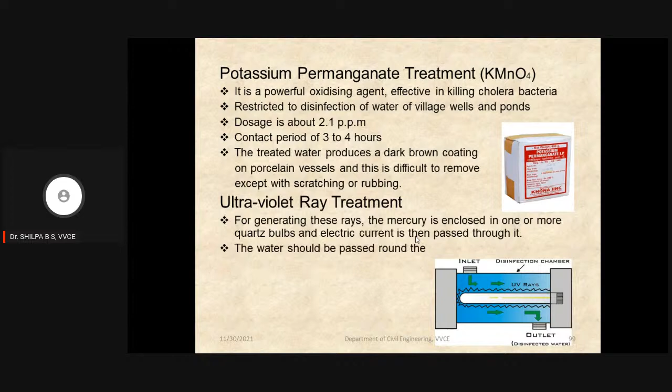The most important and commonly used method is chlorination. In chlorination, the mechanism on which disinfection depends is damage to the cell wall, alteration of cell permeability, changing the colloidal nature of the cell protoplasm, and inactivation of the critical enzymes responsible for metabolic activity present in the cell wall of the microorganism.

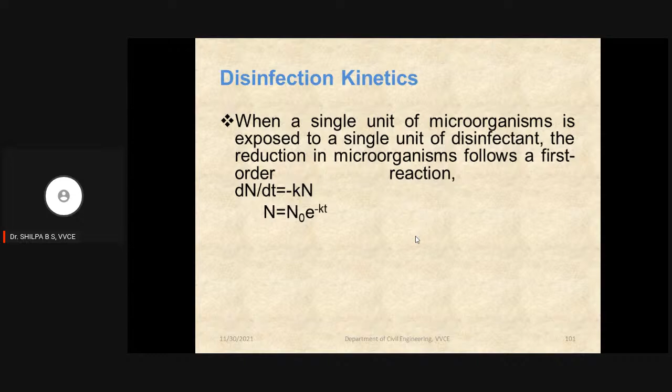Coming to disinfection kinetics: when a single unit of microorganism is exposed to a single unit of disinfectant, the reduction in microbes follows the first order reaction. Mathematically, dn/dt equals minus kn, which simplifies to n equals n naught times e to the power of minus k times t.

This equation is called Chick's law, where n is the number of microorganisms present, n naught is the initial number of microorganisms present, k is the disinfection constant which depends on the type of disinfectant agent used, and t is the contact time.

The factors that affect the disinfection process are: the type, condition, concentration, and distribution of the organisms to be destroyed; the type and concentration of the disinfectant; the chemical and physical characteristics of the water to be treated; the contact time available for disinfection; and the temperature of the water.

This is the action of chlorine: when water reacts with chlorine, at a pH greater than 5, it forms hydrochloric acid and hypochlorous acid. This hypochlorous acid is very unstable in nature, so it further disintegrates to form hydrogen ion and hypochlorite ion.

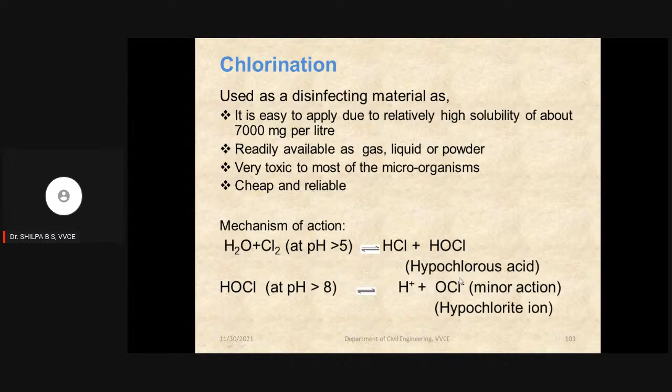Hypochlorous acid has disinfecting action, hypochlorite ion also has disinfecting action, and elemental chlorine also has disinfecting action. We only need to maintain the pH at particular levels to control the concentrations of these forms of chlorine. The various forms of chlorine are hypochlorite, chloramine, chlorine dioxide,

and free chlorine gas, which we are presently using in water treatment. The forms of chlorination refer to how we add chlorine to the water: plain chlorination, pre-chlorination meaning before treatment, post-chlorination meaning after treatment, double or multiple chlorination, breakpoint chlorination, super chlorination, and dechlorination.

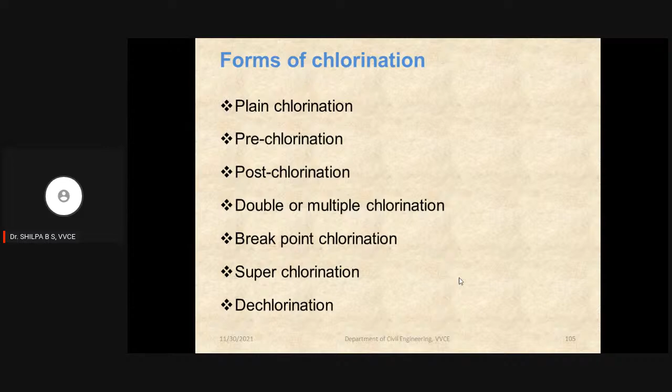This breakpoint chlorination is used to decide how much chlorine dose has to be added to treat that particular water body, based on how much chlorine demand can be assessed using breakpoint chlorination.

The tests conducted to assess residual chlorine are the orthotoluidine test, the DPD test (diethyl paraphenylene diamine test), the chlorotex test, and the starch iodide test. They may ask this as a multiple choice question.

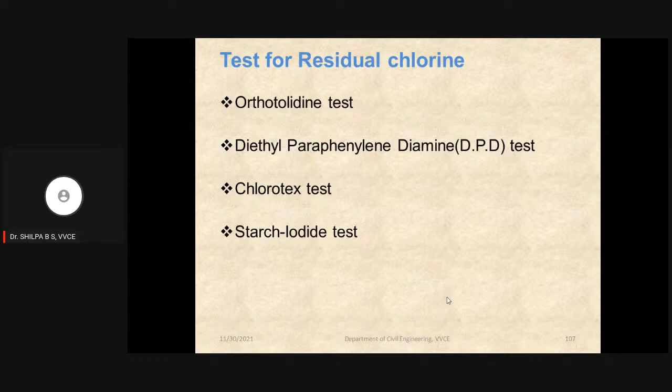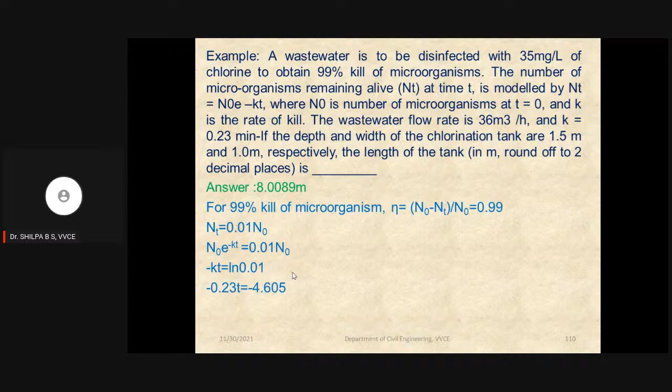The next problem is similar, calculated based on the kinetic relation, where we will be calculating the particular length of the tank in which the disinfection process is taking place.

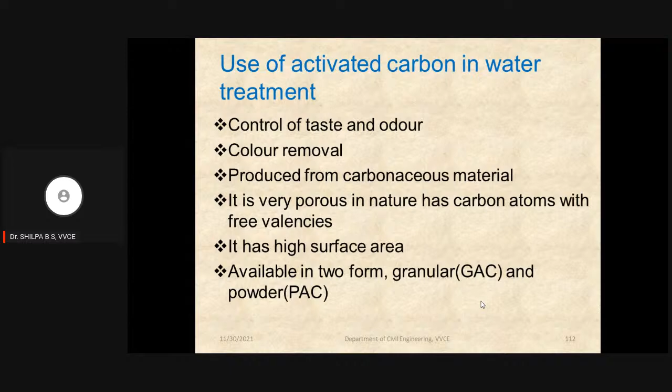Moving to the miscellaneous part of water treatment, we use the adsorption process to control taste and odor, remove color, and increase surface area during treatment. This is done using granular and powder activated carbon forms. Granular activated carbon has a surface area of about 500 to 1400 meters square per gram. This is the principle of adsorption, and granular activated carbon is used as filter media in miscellaneous treatment to remove odor or color present in water.

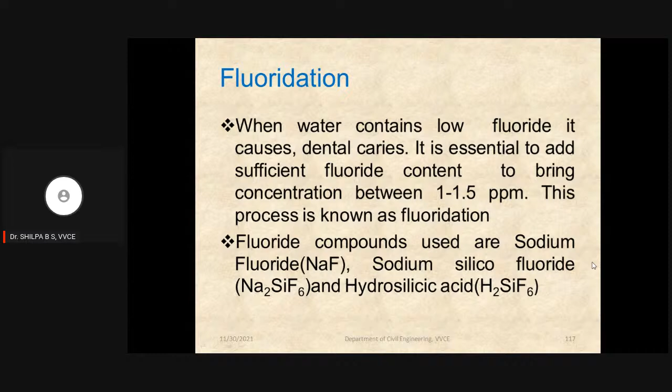Another common miscellaneous technique used while supplying water is fluoridation, where fluoride is added so the concentration is between 1 to 1.5 ppm. The compounds used for this are sodium fluoride, sodium silicofluoride, and hydrofluosilicic acid.

While providing treatment, we may also need to remove fluoride, because when it is present in excess, defluoridation has to be done when the fluoride concentration is more than 1.5 ppm. The process of reducing fluoride concentration is called defluoridation.

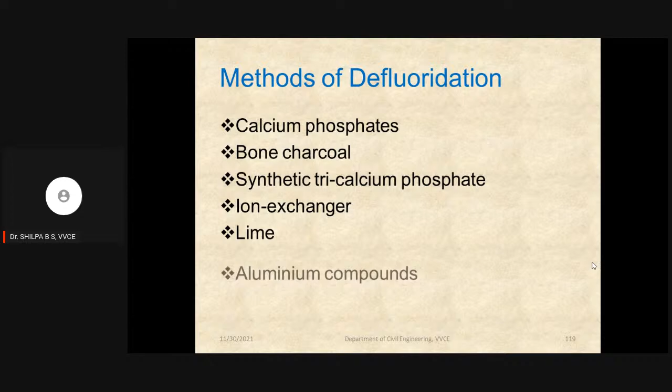The methods used in defluoridation are calcium phosphate, bone charcoal, synthetic tricalcium phosphate, ion exchange, lime, aluminium compounds, and activated carbon. But the most famous technique is the Nalgonda technique, where alum and lime are added to the water. During this process, aluminium sulfate gets precipitated with the fluoride to form an aluminium fluoride complex, and the lime helps initiate and maintain that chemical reaction. For this purpose, alum and lime are added, and that technique is popularly referred to as the Nalgonda technique.

With this, we can treat the water to the maximum extent. I hope you have benefited from the treatment methodologies explained, covering both conventional and miscellaneous treatments that can be provided to water.